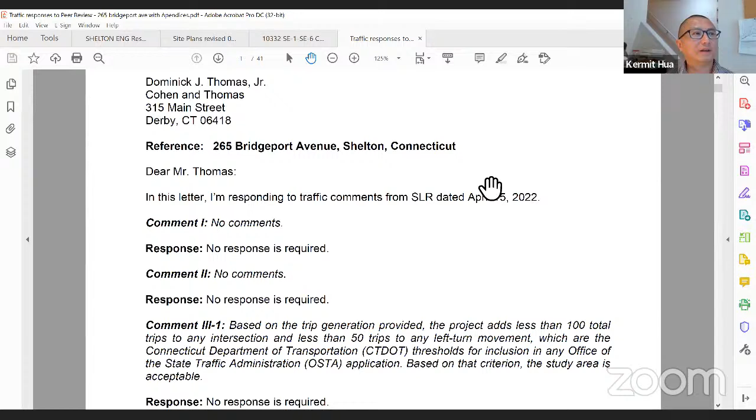I think for now this is fine, and probably we've got to make sure the chairman and commissioner can see it. I can blow it up and scroll down. Yeah, that'd be great, okay, if I do this and simply scroll down, that's fine. Alex, was this posted? Yes, because what I saw was something from January. There were three posted. All right, go ahead then.

Good evening, Madam Chair, members of the commission. For the record, my name is Kermit Hua, KWH Enterprise LLC in Meriden, Connecticut. We received the commission's consultant SLR's comments about 3 weeks ago and I responded. I really appreciate the town planner for hosting a meeting, allowing us to meet with the SLR staff online to go over the comments. Really appreciated the effort, it was very helpful for putting together these responses. The response letter dated May 10th, about a week ago, was submitted to the town planners and other parties, including the town's consultant SLR.

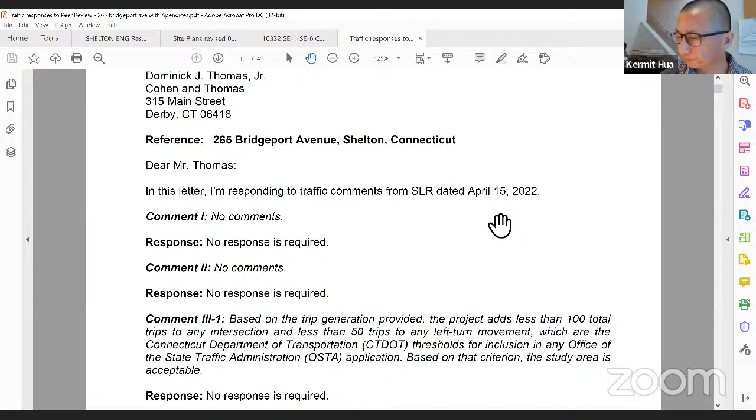Tonight I will just briefly go over the key points of SLR's comments and our responses. I will not read everything on the pages. If the chair or commission members have questions after my presentation, please feel free to raise them, or interrupt me as I go along. As you can see on the screen, comment 2.

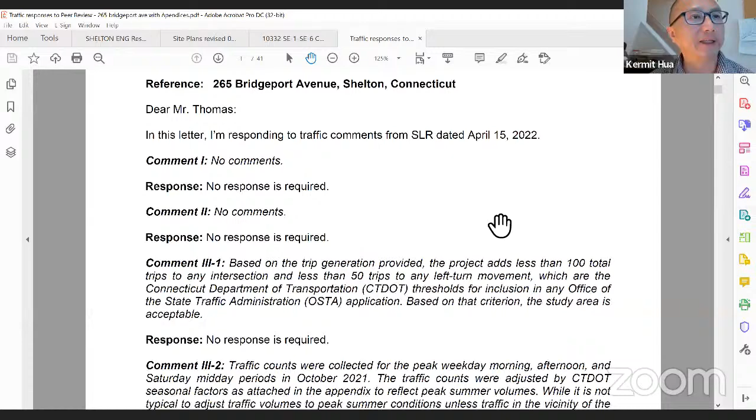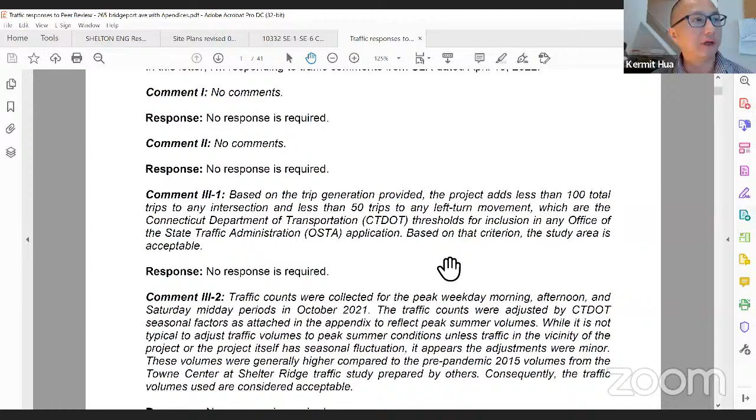Comment 3-1, SLR essentially looked at the study area, in other words the scope of the traffic study we submitted to the commission. Put another way, the number of intersections we included in the traffic analysis. Their conclusion, as the last sentence shows, is that based on that criteria, the study area is acceptable. So that's the point I want to mention.

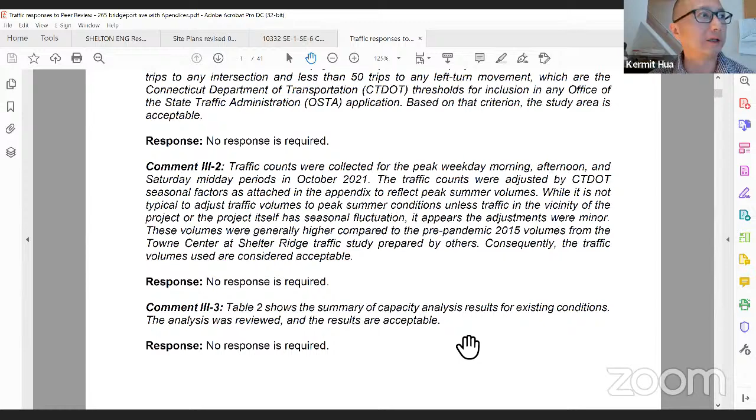Then comment 3-2 discussed the volumes we collected for this effort in late 2021, and the adjustment we made. Again, the last sentence of SLR's comment states the traffic volumes used are considered acceptable. Comment 3-3 talks about capacity analysis for the existing condition. Again, the analysis was reviewed and the results are acceptable.

If we can go to the next page. Comment 4-1 deals with no-build volumes, in other words the no-build scenario, the future traffic scenario without this development, including the growth rate we used, which was approved by Connecticut DOT. The conclusion from SLR is that the way we did that was acceptable.

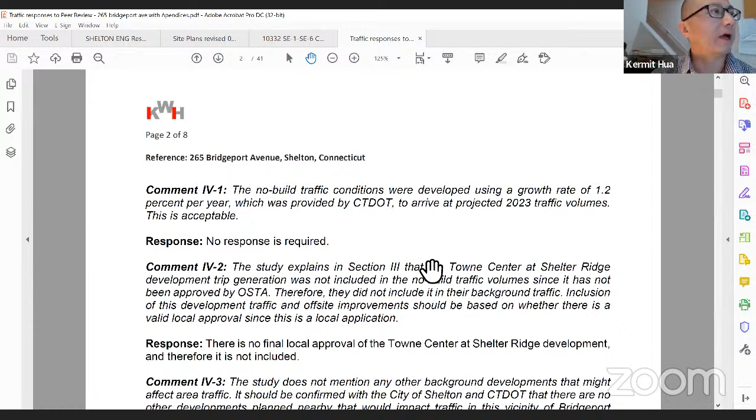Now comment 4-2: SLR consultants questioned whether we need to include the traffic from the Towne Center at Shelter Ridge development as part of the background traffic. We sorted this out during our online meeting with them, because there currently is no final local approval, as we understand it, for that Towne Center at Shelter Ridge development. So that's the reason we did not include it in the background traffic of the analysis.

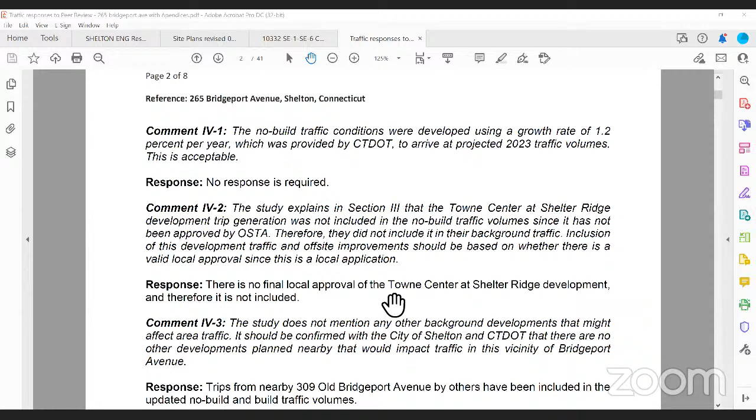That particular project, Shelter Ridge, is 2 miles south. Is that still within the study area? It is not within the study area. I think what's relevant is we looked at a traffic study prepared for that development, and sort of referenced the traffic volume they used against our collected counts. Okay, all right, that's where that comes in.

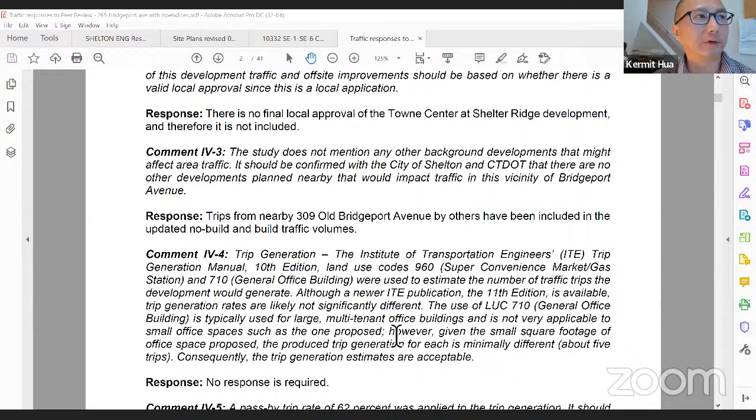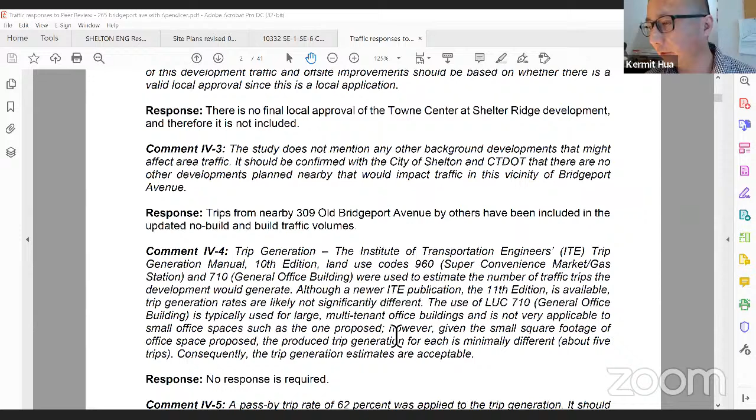Comment 4-3 asks whether there are other background developments that might affect traffic, especially the intersection of Cots Street and Bridgeport Avenue. In this case we agree there are - recently there's the 309 Old Bridgeport Avenue project that went before the commission. So in the revised traffic analysis, in response to these comments, we added the traffic from 309 Old Bridgeport Avenue. That's our response - it's a new apartment building, on Bridgeport Avenue, right east of the car dealership.

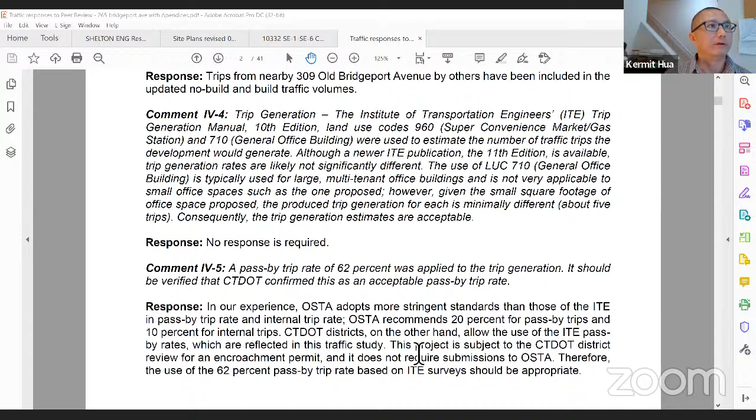Comment 4-4, trip generation. Again, they go through our method and the land use and so forth. The last sentence states the trip generation estimates are acceptable. So I want to highlight that the town's consultant agrees with our trip generation methods and estimates.

Commissioner Kelly has a question regarding the recommended trip generation. You talked about the apartment house, is that the only thing you included? I'm not quite sure if this came into fruition maybe a couple of months ago, the Moss property. Are you going to include something for that? A lot of properties have been sold up there, so it is going to be a project. It's not like Shelter Ridge in a kind of a dormant situation, this is going to be a valid project.

I can jump in on the Moss property, since I'm involved in it, I don't think it would be considered because no application has ever been made, not even for the subdivision. Isn't there an application for the road? There's an application for the road, but there's no application for uses on the lots.

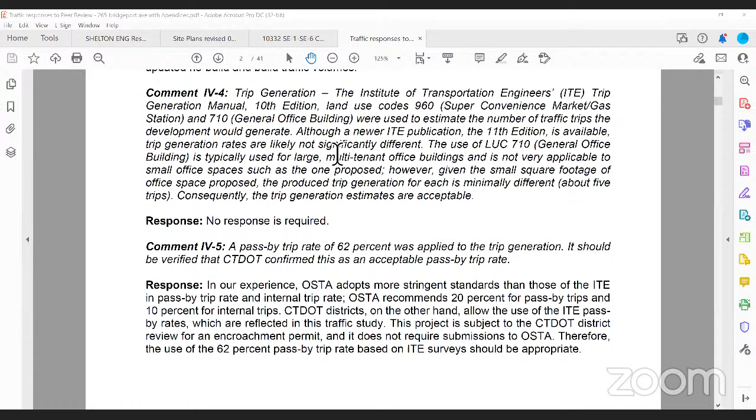So if we saw in the paper that one of the companies bought so many acres, should we consider that? I'll leave it up to Kermit to respond, but I don't think you should consider that, it's really speculative. No one knows what they're going to do until they file an application. Is that correct, Kermit? That is correct, I absolutely agree.

I think if we apply the same criteria we used on the town center development, if a project has been approved by the town, we are more comfortable including them in the background traffic. If it's only at a discussion phase, who knows whether that will go forward in the current form they are suggesting or not. So we really don't have anything to go by if they have not formally submitted anything to the town or have anything approved by the commission.

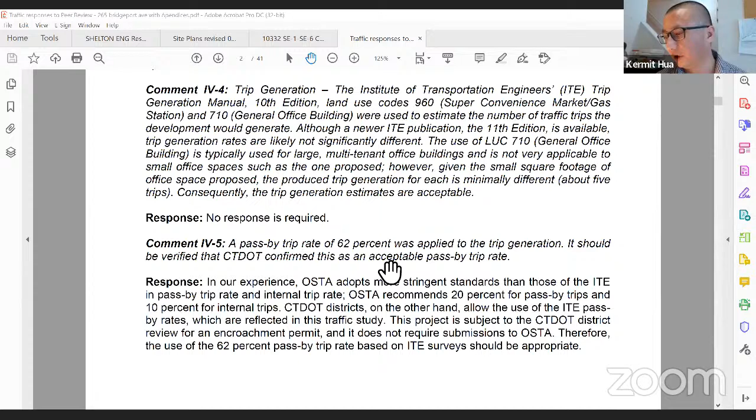Comment 4-5, the commission's consultant commented on the appropriateness of the pass-by trip rate of 62%, which was based on ITE data. I think their main point is OSTA, the Office of the State Traffic Administration, formerly the STC, tends to be more conservative in applying pass-by trips. On their review projects in the past, their practice is allowing up to 20%. But in this case, we do have ITE data. My argument at a meeting with SLR is that this project is not subject to OSTA review.

Our experience dealing with the CTDOT district office, which we will have to seek an encroachment permit from, they will review the traffic study. They are usually okay with using the ITE pass-by rate, in this case 62%. So that's my response. At the district office, in my experience, they've accepted these kinds of percentages, and since this is not subject to OSTA review, my professional opinion is the 62% pass-by rate is appropriate.

If we may go to the next page, page 3, comment 4-6. The trip generation volume figure should show pass-by trips, and they ask us to show those trips in separate figures. I attached those figures as part of this submission. If you print out the attachments to this response letter, they are all included in the appendices.

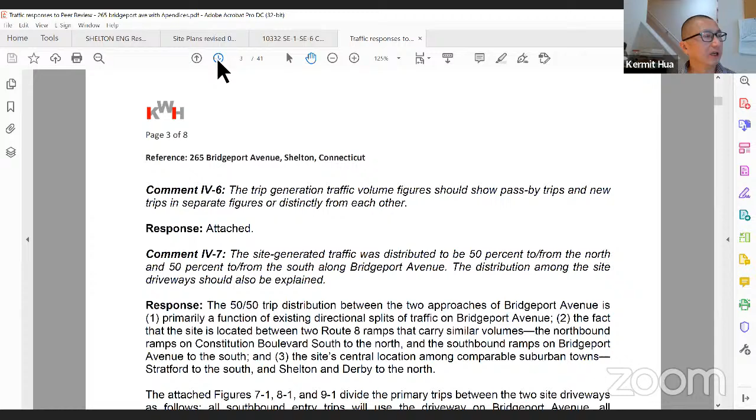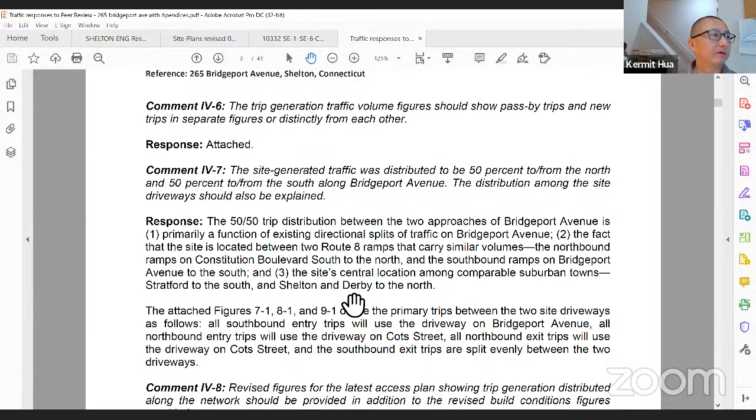Comment 4-7. The SLR is looking for more details in the trip distribution, which is 50% to the north and 50% to the south along Bridgeport Avenue. Here, as you can see, I provide two paragraphs of response to that question. There are several factors. The reason I use the 50-50 split between the two approaches.

One is the current volume is almost equally split between the two approaches of Bridgeport Avenue. The second point is the location is located at the midpoint of the two ramp intersections, one to the north via Constitution Boulevard South, and one right on Bridgeport Avenue.

The third point I made was that it's a central location in these comparable suburban areas, with Stratford to the south, and Shelton and Derby town center to the north. So it's in a central location. That's the reason I used the 50-50% split.

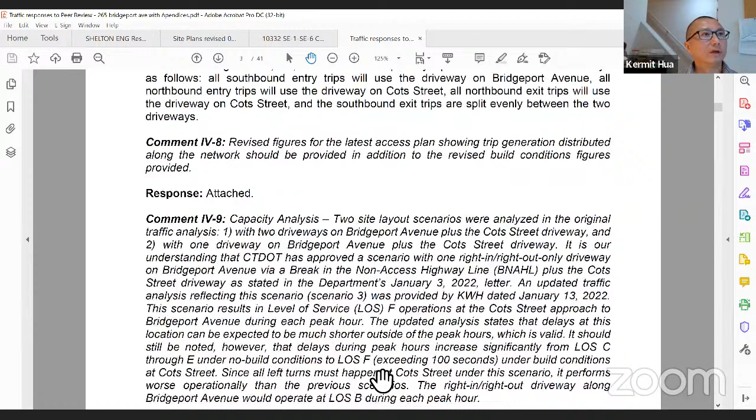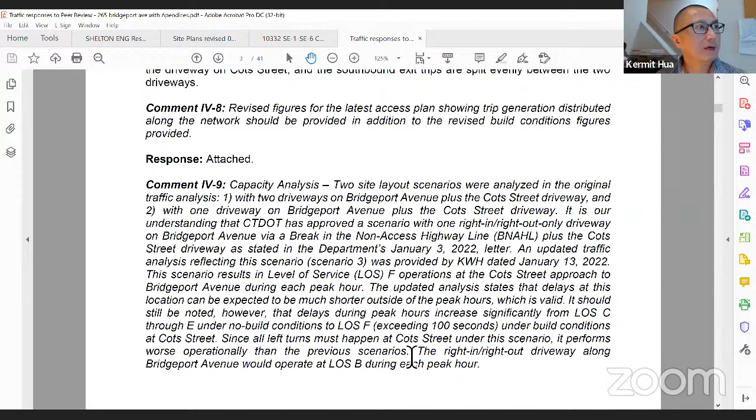So I provided more information in figures 7-1, 8-1, and 9-1 as described in the appendices attached to this response letter. That's my response to that comment. If you can scroll down, comment 4-8 is about the revised figure showing the distribution.

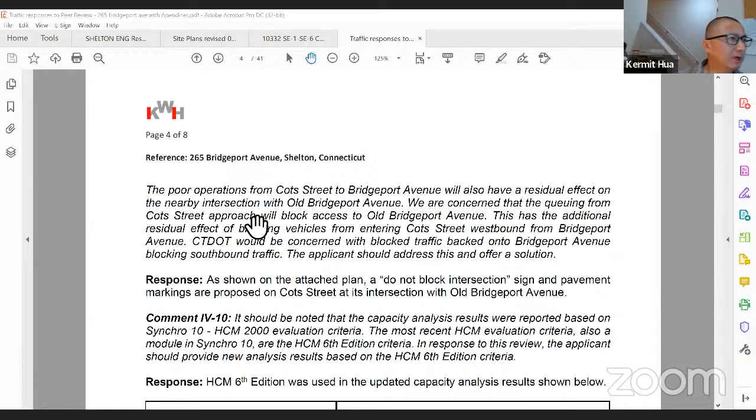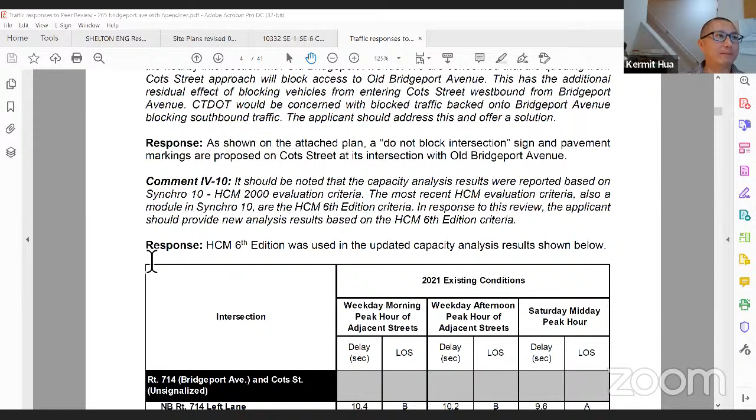Comment 4-10: the consultant commented that we were using Highway Capacity Manual version 2000, but they wanted to see Highway Capacity Manual 6th edition. In response, I made the changes, and as you can see here, I included all the traffic analysis tables following the 6th edition as the consultant wished. That's been addressed in those three tables.

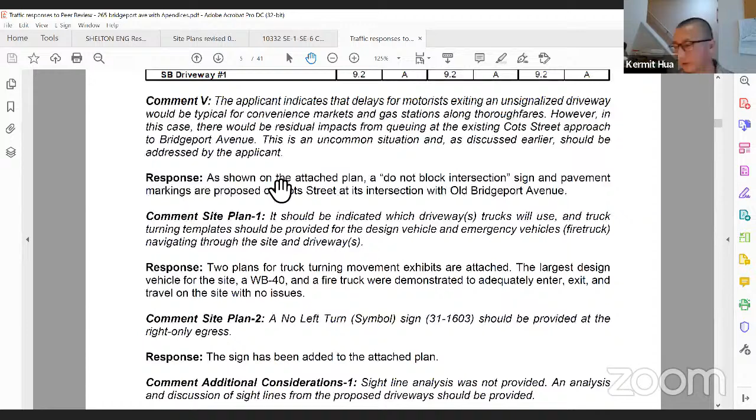On the next page, comment number 5, that's essentially the same comment about the closeness of the two intersections, so the response is the same. We're proposing a 'do not block intersection' sign and a pavement marking to reinforce the message of not blocking the intersection.

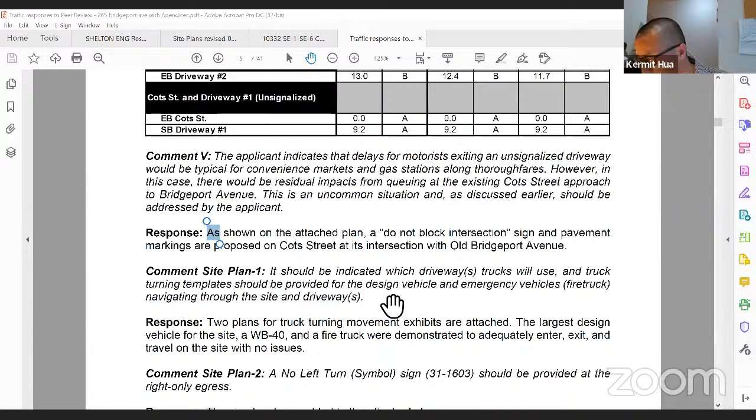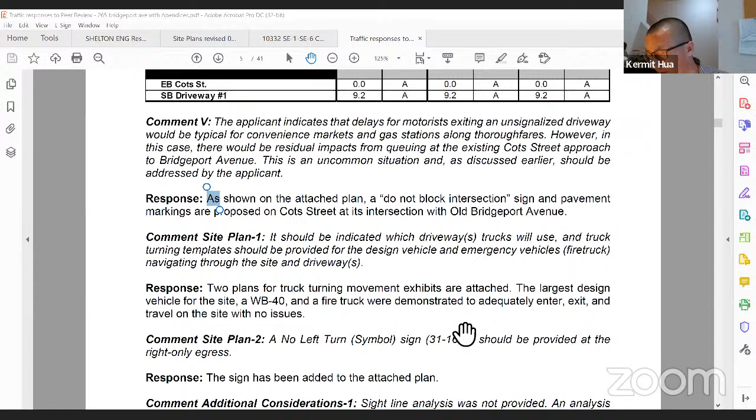About site plans, Brian will be in a better position to address those. Just briefly, we provided all the truck turning movement exhibits the consultant asked for, including fire trucks and the largest tractor trailer, the oil delivery tractor trailer for the site.

Comment site plan-2: a no left turn sign should be provided at the right-only egress driveway. They're talking about a driveway on Bridgeport Avenue. I think that sign has been incorporated on the site plan.

At the bottom of page 5, comment additional considerations-1 is about sightlines. I think the sightlines on both Bridgeport Avenue and Cots Street have been added to the site development plan. Now we're at page 6, comment additional considerations-2, crash analysis.

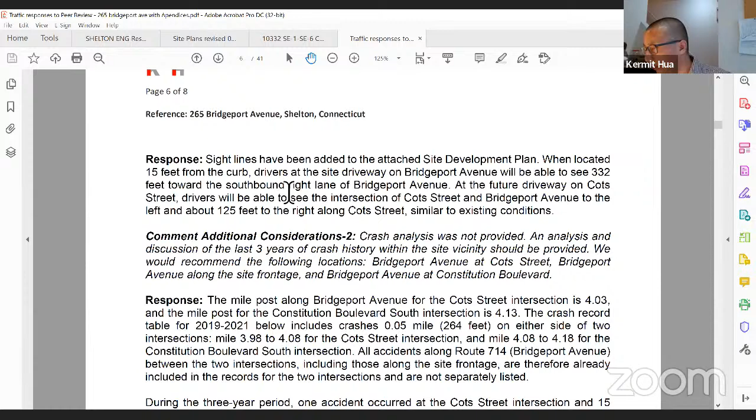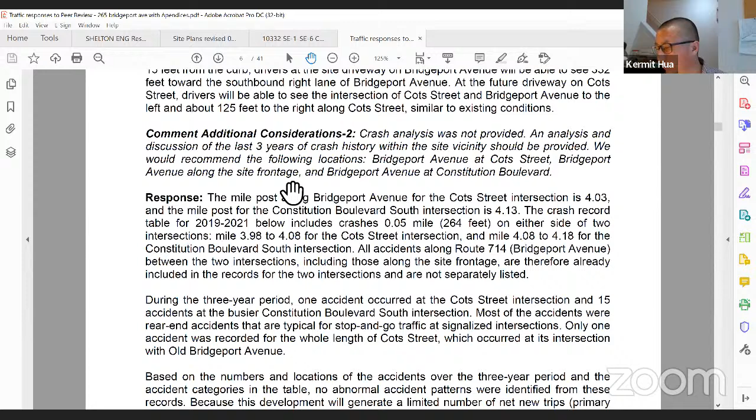That has been included on page 7: the crash analysis for the intersection of Bridgeport Avenue and Cots Street, Bridgeport Avenue and Constitution Boulevard South, and Cots Street. I summarized the accident records for the past three years, 2019 through 2021. There was one accident at the intersection of Cots Street and Bridgeport Avenue, our key access intersection, so not much going on there over the three-year period.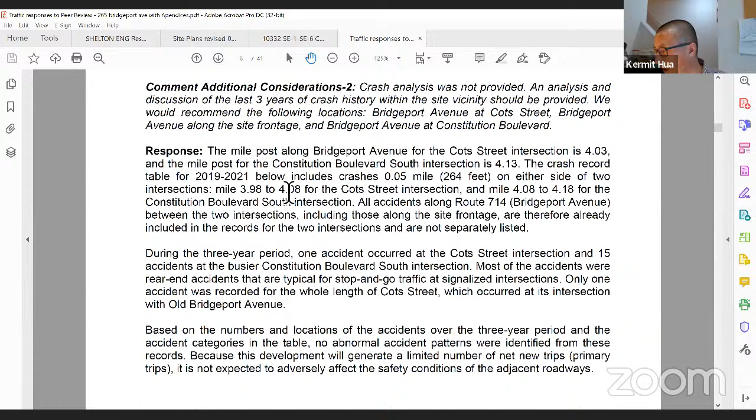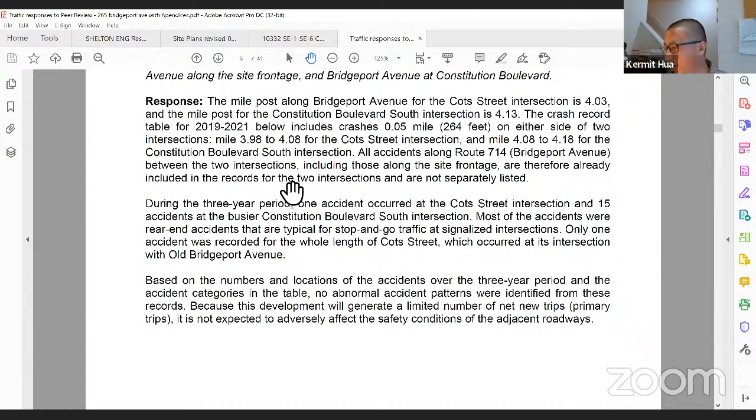Also on Cots Street, remember this is the whole length, not just the section near the gas station, we only had one accident. The records did show 15 accidents over three years at the intersection to the north, Bridgeport Avenue and Constitution Boulevard South, averaging about 5 per year at that relatively busy intersection, since it has access to the ramps further east on Constitution Boulevard South. That's the accident summary, and we're at page 7.

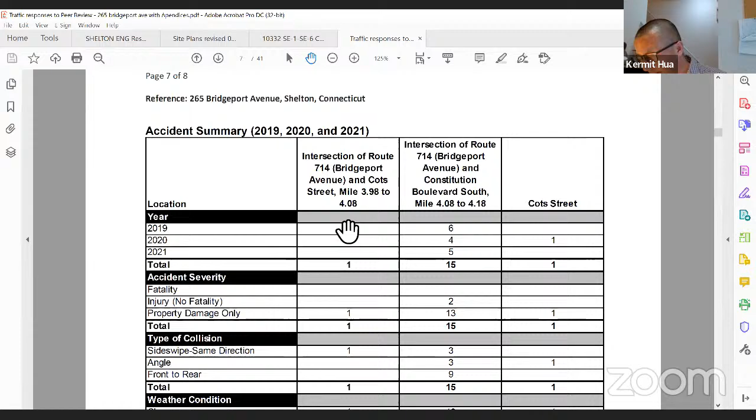Comment on Constitution Boulevard West: SLR basically said this gas station most likely happened before all the proposed improvements to Constitution Boulevard West will happen, so that comment really does not require any response from us.

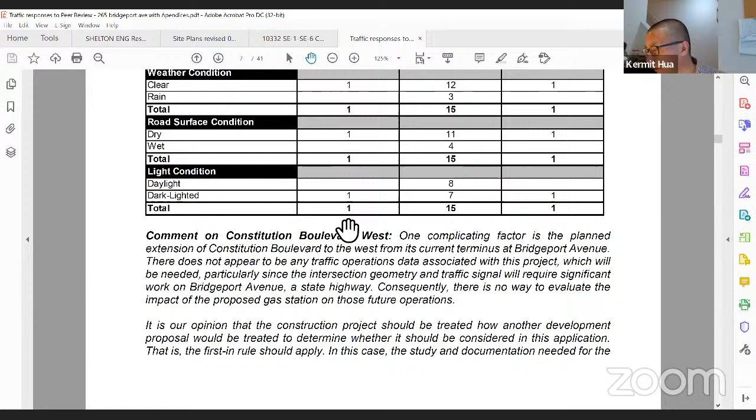So that's all I have, Madam Chair, unless the commission members have any questions. Any members of the commission have any questions for Kermit? Mr. Panico, how about you?

It's difficult to respond at this time. I don't agree with a lot of the statements that were made, but I think it needs further discussion and review before I can comment intelligently on it.

The one thing I would say is about the suggestion to post signs and do pavement markings. There are other places in town where signs have been installed saying no left turn, and people do it anyways. There are areas downtown with pavement markings showing not to block the intersection, and something happens where the road has to be torn up and those markings aren't replaced. So while it's a good idea, it doesn't always work out to do what it's supposed to.

Also, my major concern at that intersection is traffic coming off of Bridgeport Avenue that wants to proceed on Old Bridgeport Avenue. If they're not able to, and they have to stop and wait, you're going to be blocking that direction of traffic on Bridgeport Avenue. I don't know how you can avoid it. I don't have a suggestion to correct it, but it's going to be a major issue. And the volumes are going to go up a lot on Cots Street for motor vehicles trying to leave to get onto Bridgeport Avenue to go east or west.

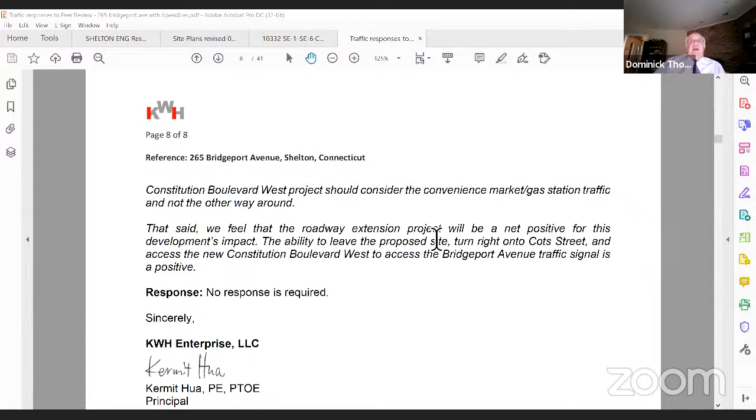Brian, are you there? I am. Can you hear me? Yes, I can. Can you see my screen? Can you see the map now up on the screen? I can. Okay.

And Brian, do you want to go through the map first and then through the response to the engineer?

So Dominick, I might be able to run through quickly what changes have occurred on the plans. I've grouped it into responses to the city engineer's comments, some minor comments incorporated as part of the peer review, and a couple of lingering general changes to the site plan. I thought I might tick down the city engineer's comments and explain to the commission how it has been responded to in the plans.

Brian, did you state your full name for the record? Of course, Brian McMahon, licensed professional engineer with Redniss and Mead Inc., out of Stamford.

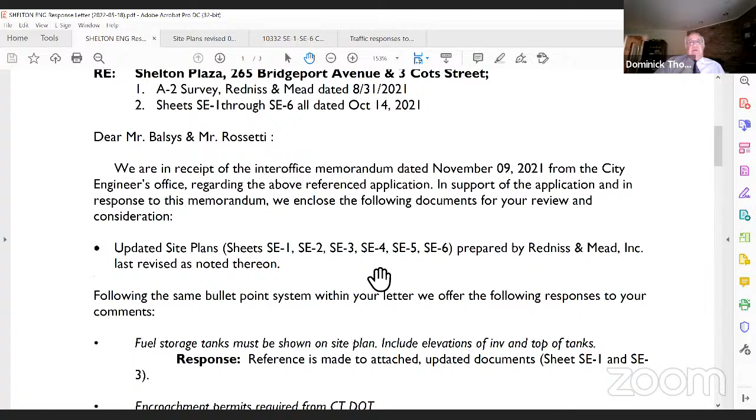Okay, I'm going to run down real quickly, there's not too many of them. The city engineer's comments were from way back when the application was originally filed. I have the responses right here, I'll jump around just to group them by what is relevant to the plans and what is not relevant to the plans.

So the fuel storage tanks, that first bullet point there, the city engineer asked that we depict those with elevations on the plans. We have done so on sheet SE-1 and SE-3, through coordination with the prospective vendor of the tanks.

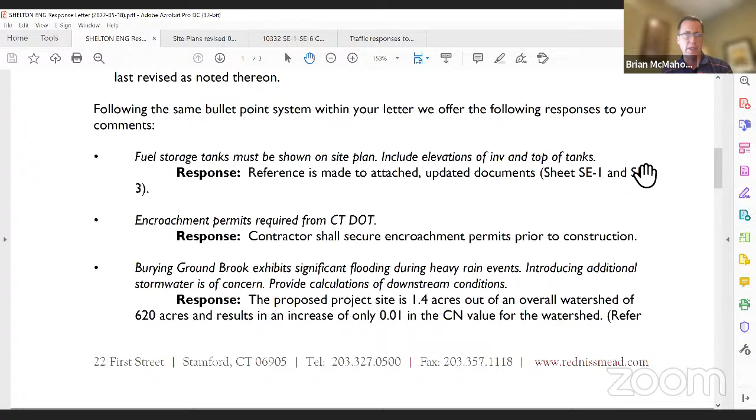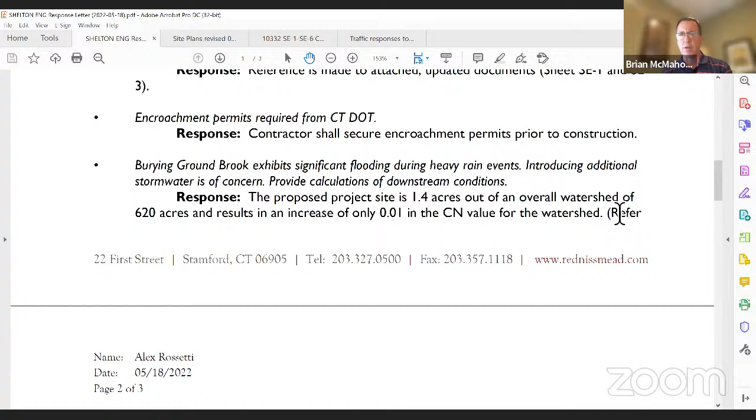If you could scroll down. The second bullet point, encroachment permits are required from the Connecticut DOT. We acknowledge those permits aren't secured until a contractor is assigned and it's ready to go to construction, but it is fully understood that any work within the right-of-way cannot occur unless and until those permits are secured.

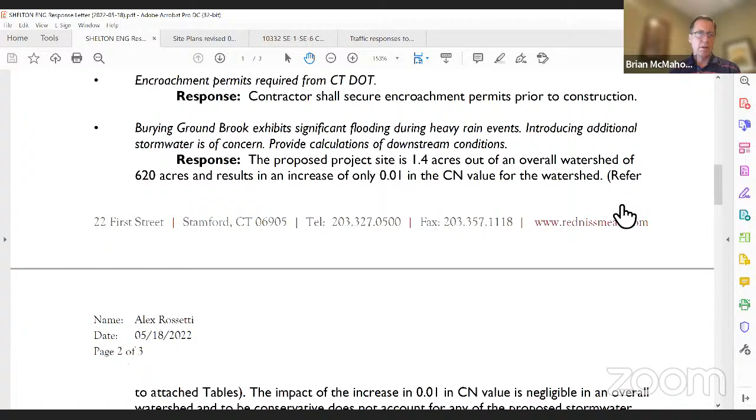If you could scroll down, Dominic, please. There you go, that's good. So the sump elevations were missing. The sumps are the spaces between the outlets of a catch basin and the bottom of the catch basin itself. We have added that information onto sheet SE-3, as well as the next comment, the inset map, which we've added to sheet SE-1.

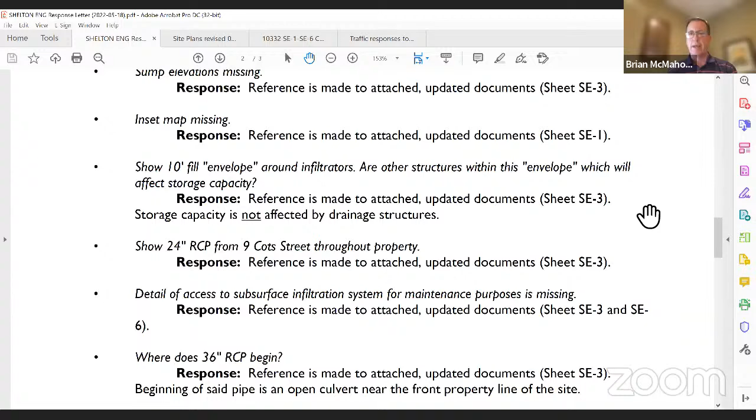The next comment showed a 10-foot fill envelope around the infiltration system, the stormwater mitigation system. The city engineer questioned whether any structures in the area would affect the storage capacity and performance of the stormwater attenuation system. We have shown that fill envelope on sheet SE3, and confirmed that any structures or pipes in the area have no bearing on the capacity of the stormwater management system.

The existing 24-inch concrete pipe that runs through an easement on our site and drains water from 9 Cots Street, which is the medical building adjacent to the site just west of it, we have extended to show the full pipe run as requested. That is on sheet SE-3.

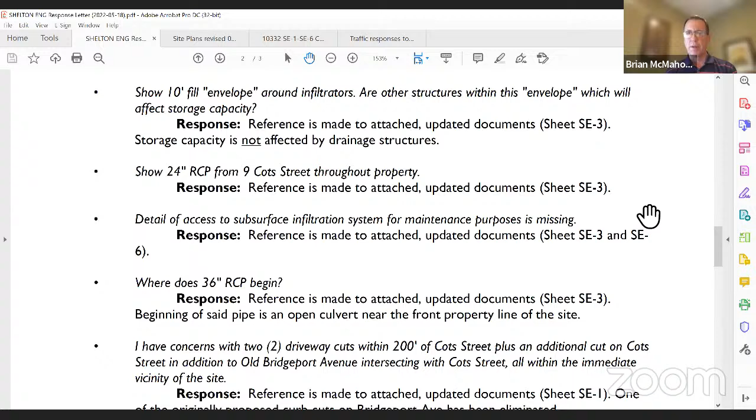Details of the access to the subsurface infiltration system for maintenance purposes - we have added that in, reflected both in plan view on SE-3 and in detail on SE-6. You questioned where the 36-inch concrete pipe begins - it actually begins on our site. It is an open-ended culvert and has been shown on the plans and continues to be shown.

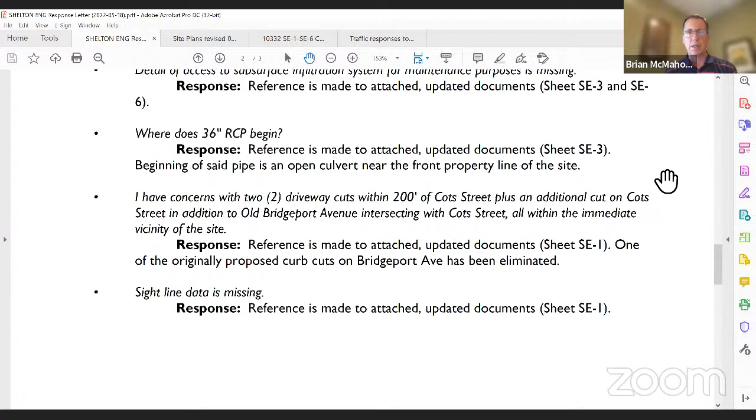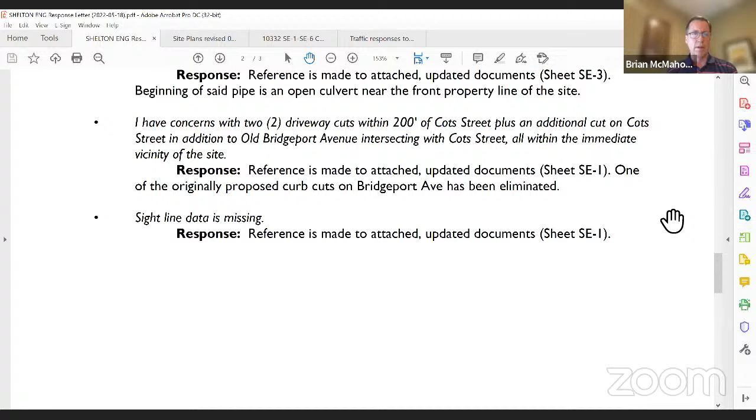This next comment is a bit of a moot point - he had expressed concern about having 2 curb cuts on Bridgeport Avenue, so that is no longer an issue. As the commission knows, there is only 1 curb cut now. And the sightline data, which we added as part of this, is only for the proposed curb cut on Bridgeport Avenue, shown on sheet SE-1.

All of those comments that go to the plans, all of the changes that I've mentioned here were part of the April 14th drawing set and have been on since then.

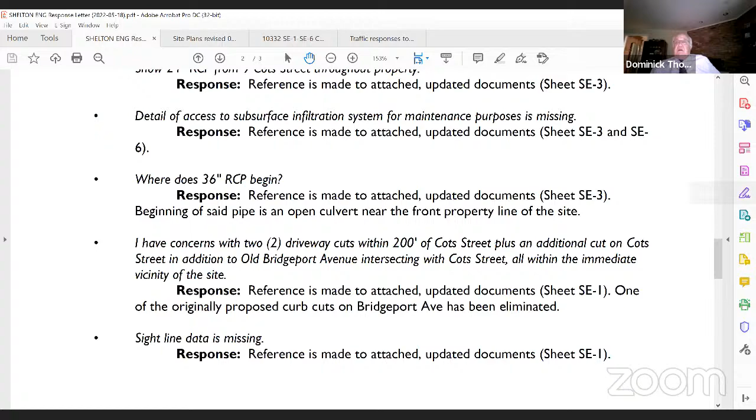If you could scroll up, please, Dominic. Oh excuse me, on the letter - whoops, wrong thing, okay, wrong job. So that's good, that's good right there.

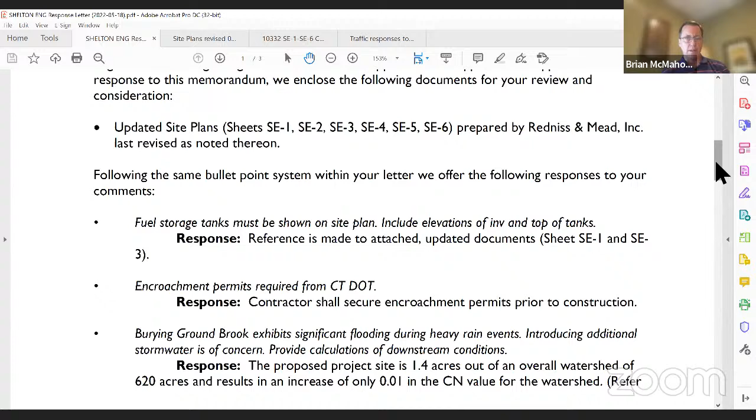So the last 2 comments the city engineer had were a concern about the burying ground brook. I had spoken with Remus about this and learned a bit more about his specific concern. It was relative to a few driveways on the opposite side of Bridgeport Avenue, north of our site, in fact north of, I believe, Constitution Boulevard, where several years ago during a heavy rainfall, culverts that carry the brook under these driveways had washed out.

I explained to him that I felt that our site, notwithstanding the fact that there is an increase in coverage on the site, is a small part of the overall watershed of the Burying Ground Brook in this area.

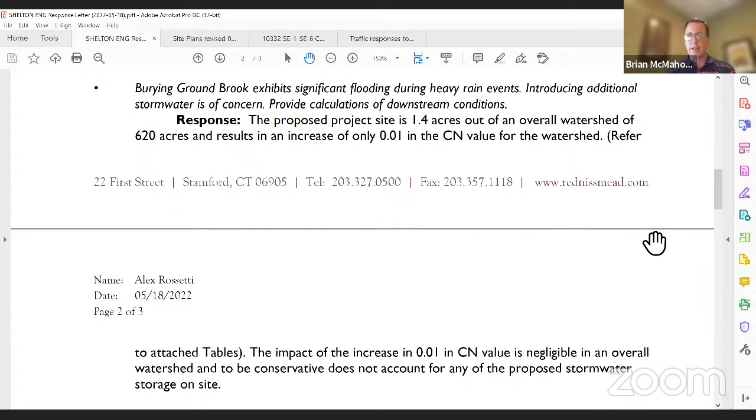In coordination with the city engineer, we took a look at the record FEMA flood insurance study for Fairfield County. It shows that in the area of the Burying Ground Brook near our site, there's about a square mile, or just under 640, about 620 acres of watershed that feed through the brook at that point. We did an analysis, included with our response letter, of the effect of that on what we call the CN, the coverage of the surface treatment of the watershed area.

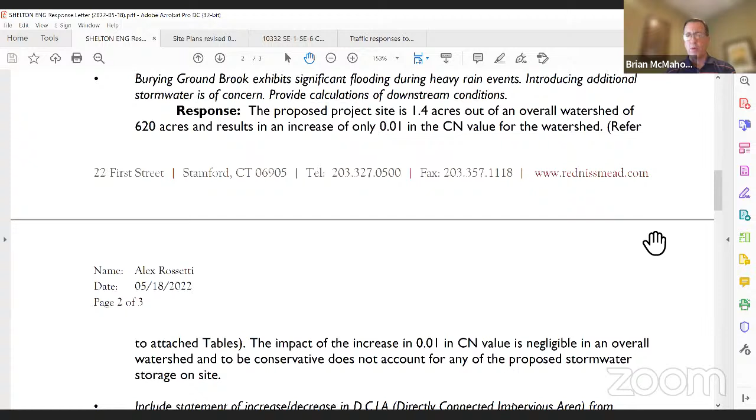It had almost no impact at all when you take into account our 1.4 acre site within the 620 acre watershed that is part of the Burying Ground Brook in this area. It had almost no effect on what we call the CN, the coefficient for the surface treatment within the watershed.

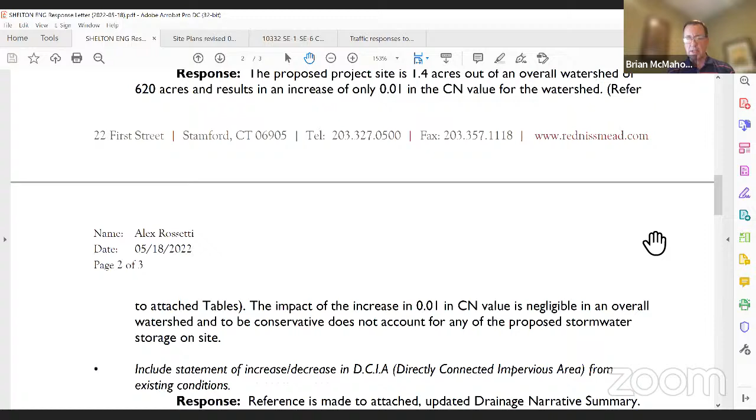That's coupled with the fact that it doesn't even take into account the storage we have proposed on the site for attenuation. We've provided a system that not only provides water quality infiltration into the ground, but also controls peak rates of runoff from the site at or below existing conditions. So I believe we have demonstrated that our development is not going to exacerbate any flooding conditions in the Burying Ground Brook downstream of our site.

And then finally, the statement - I had one more comment, Dunn, if you don't mind. The one below that is most municipalities need to track now, the directly connected impervious area. That refers to impervious area that is tributary directly to receiving storm drains without any treatment, whether through a structural system such as we proposed here, or some type of biofiltration across vegetated areas.

What we've demonstrated is that all of the impervious coverage under existing conditions is directly connected, and virtually none of it under proposed conditions is. We are capturing all of the impervious coverage under proposed conditions and treating it through the proposed stormwater management system. That's the sum total of the city engineer's comments.

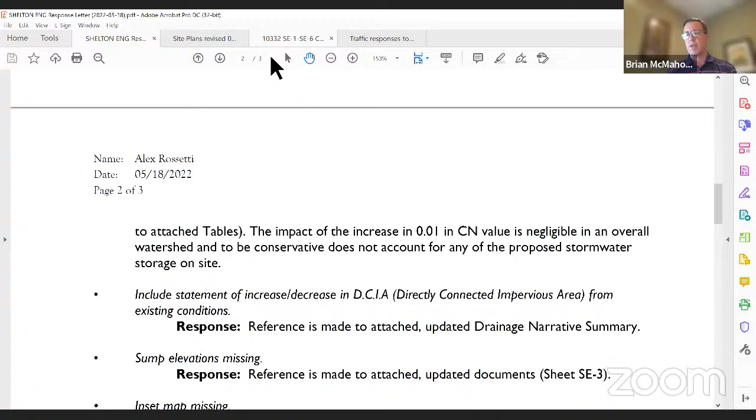Additionally, as Kermit mentioned earlier, in the more recent set of plans we submitted, and to the chair's question at the beginning, the only difference between the April 14th drawings and the more recent drawings are the few comments born out of the peer review. That's really the pavement markings and signage located primarily at the Cott Street intersection, as well as the no left turn sign that will be placed at the Bridgeport Avenue curb cut.

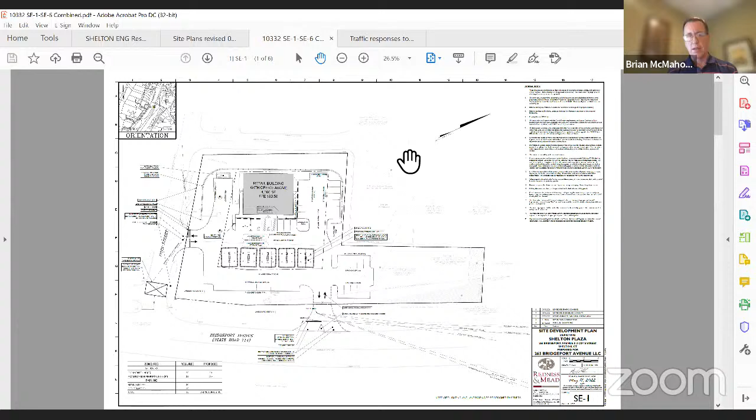Whoops. Oh, Dominic messed up here.

Other than that, I would just point out to the commission a couple of general items, in addition, one other change to the site plan overall as it has evolved from when it was first presented.

Brian, let me see if I can get him back up. I have an issue here, okay? Just hold on a second. I'm gonna stop sharing, I'm gonna see if I can get the plans back up again. There was something that happened to mine. Let me just see here. Yeah, hold on. Let me... You want me to try and share? If you can bring it up, if you can share, why don't you try to bring it up? I seem to have had an issue with the computer. Can you see it? Yep.

Yes, okay. So one last comment, just to point out a change in the evolution of the plan, and I think it went mainly to one of Mr. Panico's comments, is to increase the green space along the frontage here. One of the changes we did was we pulled this paved area, which had been closer to Cott Street, and pulled it away, moving some of the utility infrastructure out of that area to increase the room and pull it away, increasing the green space along the Cott Street frontage.

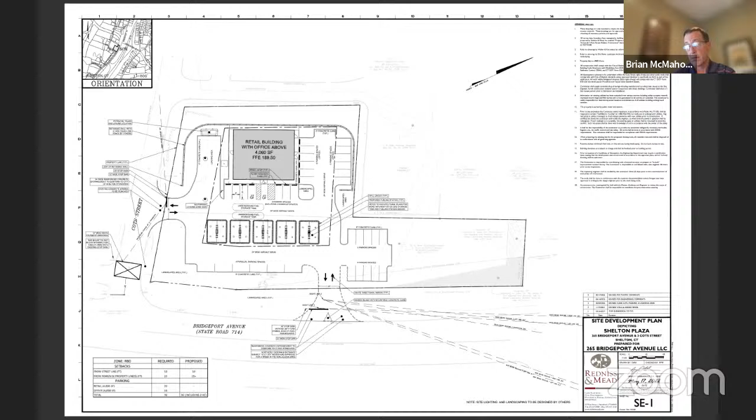While that may be the case, I think it's best to have one direction that cars face, otherwise you've got cars facing each other. If we put that into place behind the Stop and Shop, at first they wanted the cars to come in closest to the little driveway in front of Burger King where the pumps were gonna be, and I held out that cars should continue further down the driveway, heading towards the back of Stop and Shop, and then come in and face Bridgeport Avenue.

So I think you better look at that so there's no conflict when you have a tight space. I can see a little bit of congestion there occurring, and some bottleneck occurring if cars are not directed to come in and face a certain way and exit a certain way.

Well, you've got 4 cars per pump, right? Yeah. But again, I think if you eliminate one of them, you'll eliminate some congestion. The volume would be down, but you still have to have a specific direction - even if you eliminate one, you could have 20 cars. And that's not taking into account somebody coming in just for the convenience store, or occupants for the second floor office section of the building that's proposed. So I think the traffic pattern to access the pumps has to be determined.

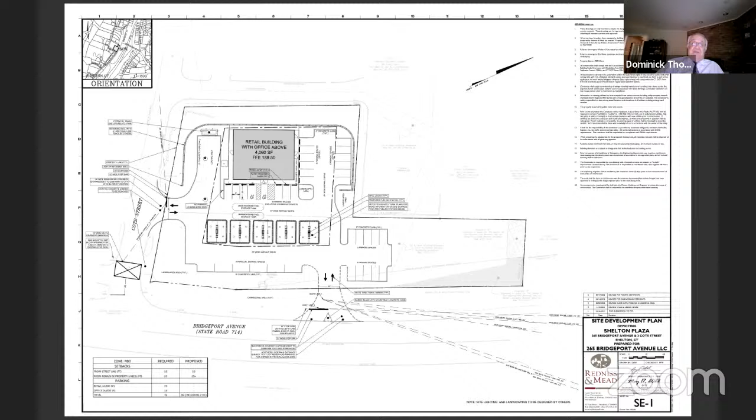Okay, and I hope no apartments either. That would require a modification, but since we've been talking a lot about traffic, I would just comment that it would be much less traffic, but I'll leave it at that.

Madam Chairman - yes, go ahead, Mr. Panico. I just wanted to advise the applicant that I did set down probably 5, 6, or 7 comments, most of which are relatively minor - it's only a matter of addressing them. But there were 1 or 2. Rather than getting into a discussion of them tonight, I think I would just advise the applicant that they'll be seeing it, and we will be looking forward to their responses.

Is this something that's already been filed? Because I don't think we have it yet. No, it hasn't been officially filed yet - I drafted it, and we're talking about it and making sure that we're in agreement on it.

Some are technical. The zoning requirement requires a 10-foot green buffer strip, and you don't have it along that northerly property line. On the other hand, a slight shift of the building towards Cott Street by 5 feet or so should be able to address it.

Some minor things about getting rid of the bumper blocks that you show - we've talked about it before, but they haven't been resolved. The adjustment of the parking pattern so that the clear space for the handicap spot falls directly in front of the door rather than directly in front of a car. The spaces parallel to Bridgeport Avenue are shown as 20 feet - you really can't negotiate very comfortably into a 20-foot parallel parking space, so it needs to be bumped up a little bit. Things like that, we'll get them to you.

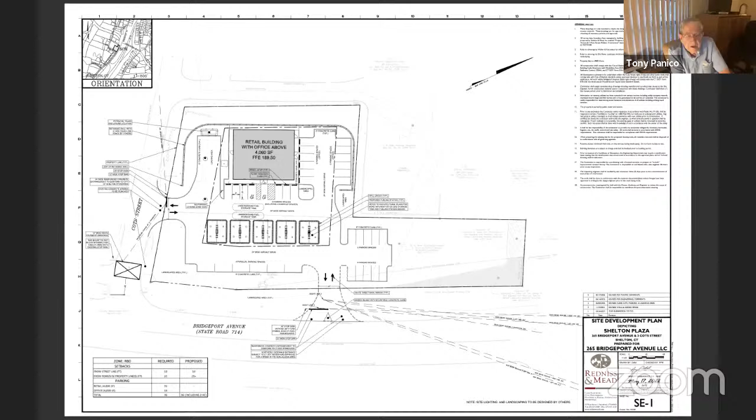And I don't want you to walk away thinking, well, we haven't said anything, so we got no more concerns, because we do. No, thank you for bringing all that up, and the applicant can address those when they're submitted.

Okay, any further comments, questions, or concerns before we open it up to the public?

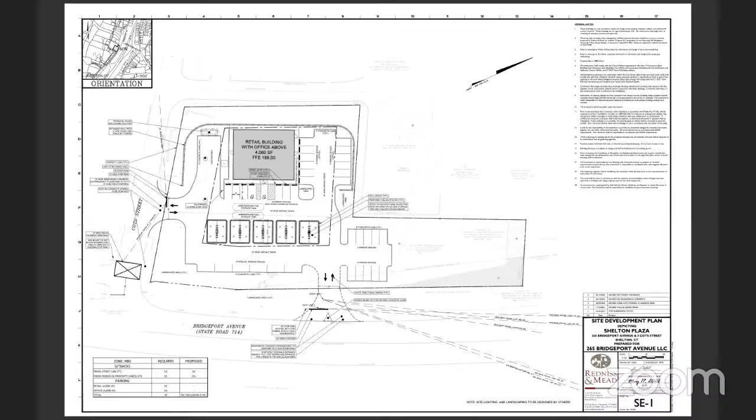Madam Chairman, members of the commission and staff, my name is Joel Green. I practice law in Bridgeport with the law offices of Green and Gross. It's my pleasure to be here before you this evening on behalf of 99 Bridgeport Avenue LLC. I've heard the comments and remarks by the commission this evening and Attorney Thomas's presentation, and I just wanted to

confirm that the hearing will be held open. And I suppose I would also ask that perhaps we can set a schedule for sort of comments or responses. The complication that we ran into is that for a variety of reasons, many of the documents were posted on Monday, and our consultants did not have adequate time to prepare and review a written response to the commission. And perhaps the commission would consider, first of all, keeping the public hearing open, which as I understand may be happening, but also perhaps we can set a date by which any further submissions by the applicant in response to the commission's comments this evening would be submitted, so that we have an orderly process.

So, with that understanding, it's not my intention to make a presentation this evening, and I appreciate the consideration by the commission. Okay, thank you, thank you, Attorney Green.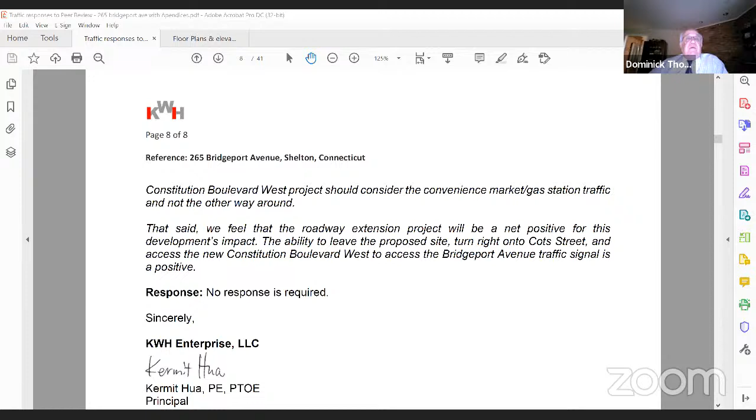So it was left up to Mr. Swift to go back to an original concept that we had once discussed, and that's what we've done. So with hopefully the luck of being able to go here. Okay, so with that, I'll turn it over to Mr. Swift to discuss the changes to the site plan and review his plans, which were provided in early April and made it onto the website, I believe, again on Monday.

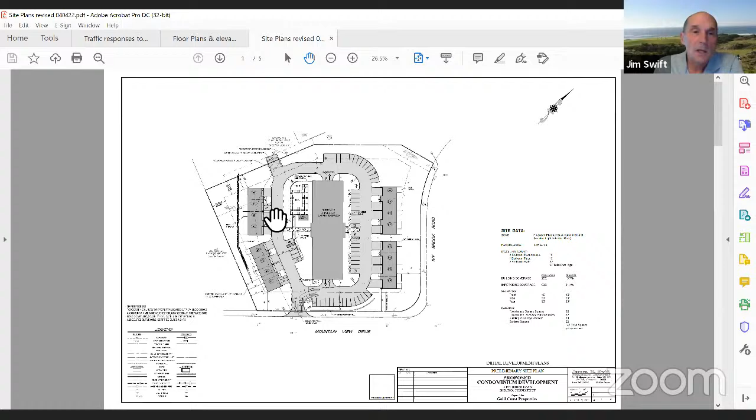Good evening, my name is Jim Swift, professional engineer, landscape architect. So on this drawing, I think my cursor is on the screen. Jim, do you want to share? Can you share from yours? I can share from mine. I have mine, I'll stop share then. Why don't you go ahead and share? Okay, go ahead. You transfer it over to my computer. Well, I think that's Alex's job. Is my display showing properly, the original application? No, not yet. Okay, I'll hang on. Jim, you just have to start sharing. Did you hit, Mr. Swift, you just have to start sharing. Oh okay. Start sharing, whatever that is. Share screen, there we go. Choose the technology. Okay, there we go, I am screen sharing.

All right, okay, so what you see on the screen now I believe is the original application, and you can see that the easement that Dominick was talking about is this area over on the site on this side, which limited us quite a bit on what we could do on our site. And we have revised, and now that we've negotiated use of that property, this plan is the current plan that was recently submitted and is now on the site.

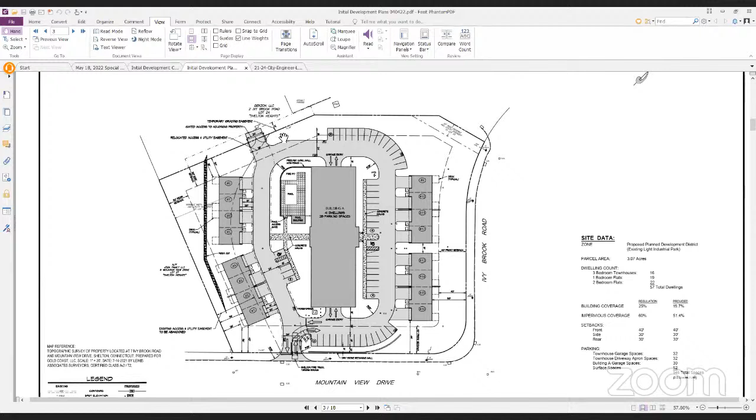Commissioner Kelly, were you referring perhaps to, is it a fully paved area or blocks? Well, no, they were talking about blasting to do it, so I wasn't quite sure if it was drivable at this point. Right, if you could go through it.

Well, okay, let me go to the next drawing and we'll discuss that. So here's the grading plan for that. And the way things worked out is that this area in the adjoining property is the area that was graded flat, for all intents and purposes, to build that second medical building. And we know what that elevation is, we've surveyed it.

And this driveway, this emergency vehicle access right here, is accessible by grade. It can be driven, if the gate was open, Mr. Kelly. That is accessible, so the slope is such that it can accommodate.

So they can go from their existing building, they can use this? Yes, yes. They don't have an existing building back there, that's a proposed building. The original building is farther up, on a separate lot, under separate ownership now.

All right, so how do they get to the road? Is this an access to nowhere? No. This open flat area that they have pre-prepared for a second medical building is connected throughout all of their property back here. In other words, their main medical access driveway is located right here. That's what I'm getting at.

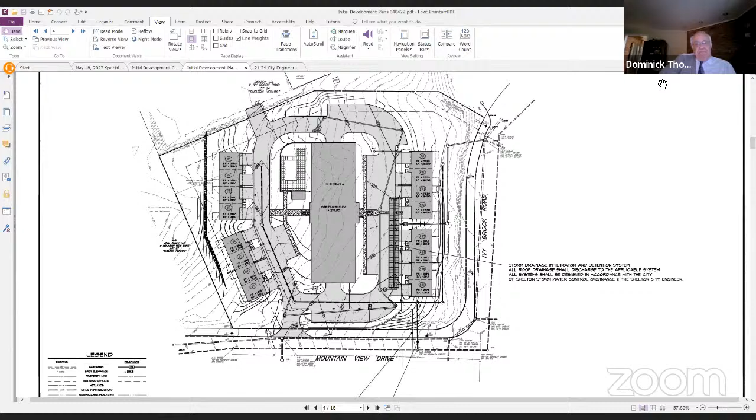Okay, go ahead, Mr. Swift. Okay, so having that flexibility, what we've done is we talked about a lot of things at the last meeting. One of the things was parking, another was building heights. And what we've done here is now that we've negotiated the release of that easement, we've doubled the townhouse count from the original 8 townhouses in the front to a total of 16 townhouses in the back and front.

And we've taken off a floor of building A, the main building. So our unit count, where we previously had a total unit count, townhouses and building A inclusive, of 63, we are now down to 57 dwellings total for all the townhouses and the building A dwellings. So we've reduced building A by a complete floor and we've reduced the unit count by 6.

Now, the second result of doing that is that the parking dynamics have changed. Even though the surface parking is the same, what we're gaining by the townhouses is we're gaining 2 garage spaces per townhouse and 2 of the apron parking spaces for the townhouses. So our previous parking count of 136 has now increased to a total parking count of 146.

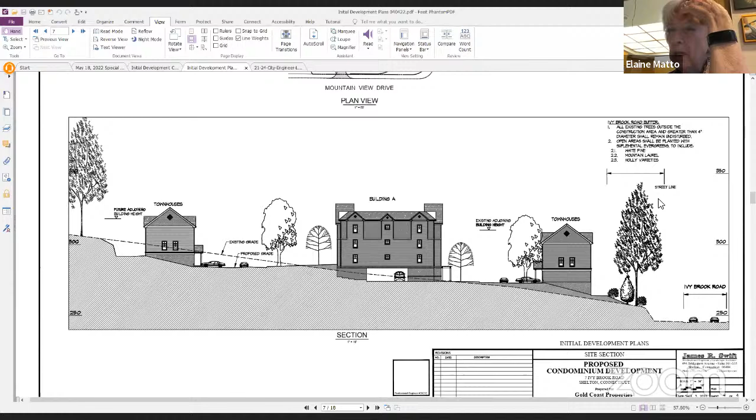Yeah, I have, it's Elaine Matto. I have a question again about parking. I can't accept that kind of analysis of the parking for the total site when you have 4 spaces basically for each townhouse, which is great. But I need to know what the parking is for the apartment style building - how many units are in there and how many parking spaces are dedicated to that building?

Sure, I can tell you the number for that. If you subtract out the garage parking spaces and the apron parking spaces, that's 32 and 32, you're going to be left with 82. And how many units are in that building? There are 41.

So, are they 1 bedroom, 2 bedroom? I can't remember. Were they all 2 bedroom? There are 19 - and Pat, you may want to check me on this - there's 19 1-bedrooms and 22 2-bedrooms. Yeah, that's what I have. For a total of 41 dwellings.

Yeah, so I still think that parking is tight. Okay, that's 2 per unit? Yes. Well, there's no - I have one more suggestion, which we could do.

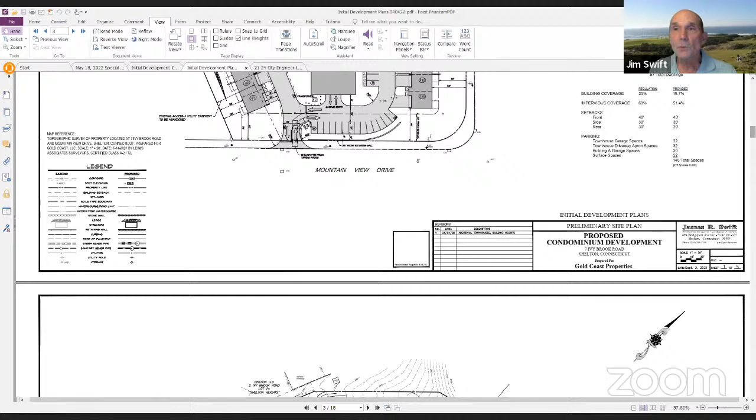This circular pattern that we have around building A, I kind of liked as a designer, but we've got a lot of area over here that we're not really using. And if you look at the grading, it's got some pitch to it, but it's definitely usable. What we can do is add a significant amount of parking in that location.

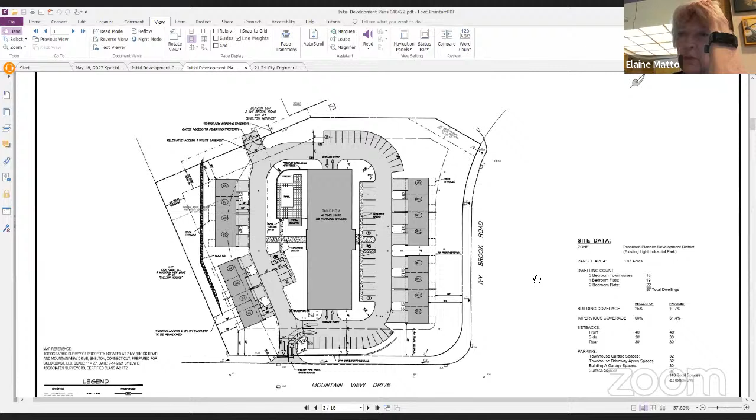I'm going to guess, I'd like to know what other people think as well, but this was proposed as partly a plan that would leave a lot of area undisturbed. And when we talk about the need for parking, because you cannot have overflow parking on the street in this area, then you talk about putting in more pavement. So it just, I have a concern.

The only thing I would like to address, and I know you've brought up, and believe me, in upcoming public hearings it's going to be addressed. There are many, you have approved some in the outer areas. This is an outer, not urban area. There's no issue with parking. There's been no issue with parking with the Mark. There's been no issue with parking with the Sawmill Apartments. There's been no issue with parking, and they are less than 2. So I guess I'm at a loss.

It's very difficult to respond when the existing apartments, the existing high-density residential, has no problem and has been around for years. The parking at the Mark, which is 228 apartments and has a clubhouse, our final resolution was 1.7, and if you go there at night, I can assure you there are empty spaces. So my whole point is now we have 2. I think maybe we can dedicate something to say future area, but I'm anti-asphalt. I don't see the need when you have 2.0 dedicated. I'm not asking for more asphalt, I'm questioning the density of the project overall for this site.

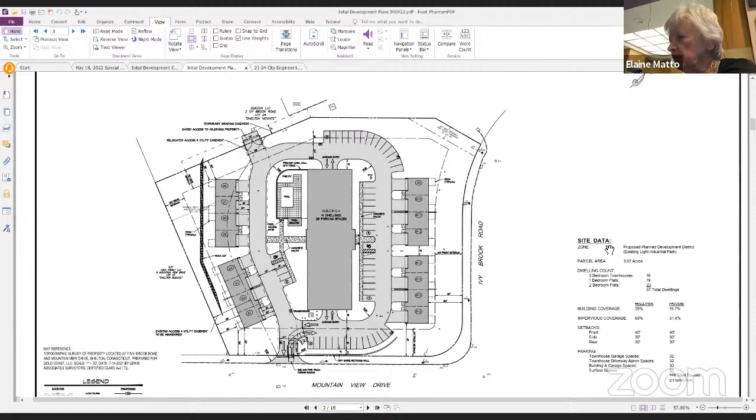Well, what was the square footage of those flats again? Excuse me, I didn't hear. This is Commissioner Ticky, what was the square footage of those flats again? You'll have to, Pat Rose would have to do it. Commissioner Ticky, you have a big echo going on when you talk, just so you know. Sorry, it's difficult sometimes to hear. The square footage of the units that are the flats, the 2 bedrooms are about 941 square feet, and the 1 bedrooms range from 659 to 701. Fairly standard for other venues.

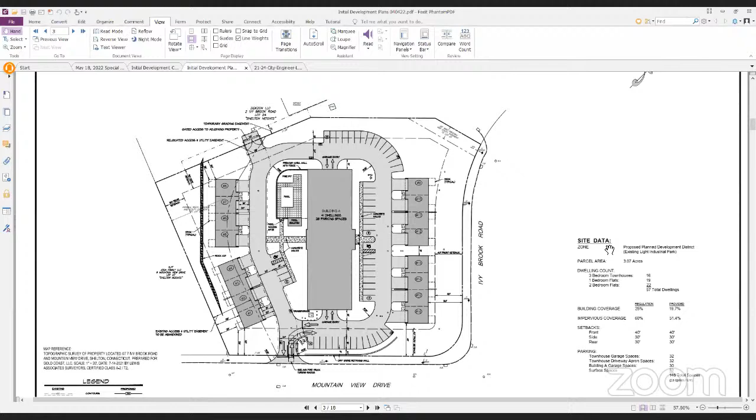All right, Attorney Thomas, do you have any other material to present? Yes, Pat Rose is going to present the architectural. Okay, so Mr. Swift is done with his presentation. Unshare, and I'll bring mine up. Okay.

Pat Rose from Rose Tiso and Company, 35 Brentwood Avenue in Fairfield, the architect for the project.

The first thing we'd like to go through is the parking level of the flat condominium building, which is accessed on either side from the circular drive. There are 30 parking spaces on this level. You have a lobby, elevator, mail, packages, and then a common space in the rear, and then 2 exit stairs, electrical and water.

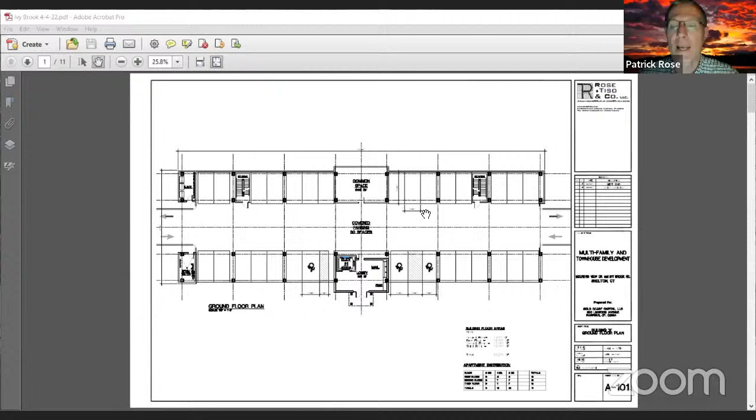Didn't we do this at the previous meeting? Yeah, it's the same, if you want to cut to the chase. What really changes is the elevation, because the apartments are the same. We've taken a level off.

Okay, let's go to the elevation. So instead of a 4-story building above parking, as you look at it on the downhill side, it's a 3-story building above parking.

You have brick on the lower level. We have an EIFS band that breaks the parking and the residential. You have horizontal siding on the first 2 levels, and then you have shakes above that, which are broken by horizontal siding, and then shakes up in the roof at the gables.

Similar building to what was presented, but not exactly the same. The other one had some board and batten because it was 4 stories. That put another material in it. We've just stayed with the siding and shakes with this.

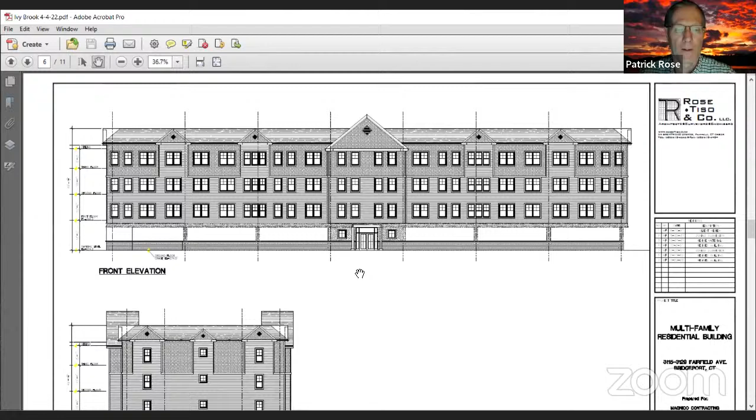The side elevation's the same, except it's 1 less floor, so you have the gables coming up to a mansard roof. The mansard roof acts as a screen to any mechanical air conditioning units up there, condensers.

So what would be the proposed height of the building? 49 feet, from the lowest level to the top. And is it still 208 feet long? Yes, same length, it hasn't changed. It's taken the floor out.

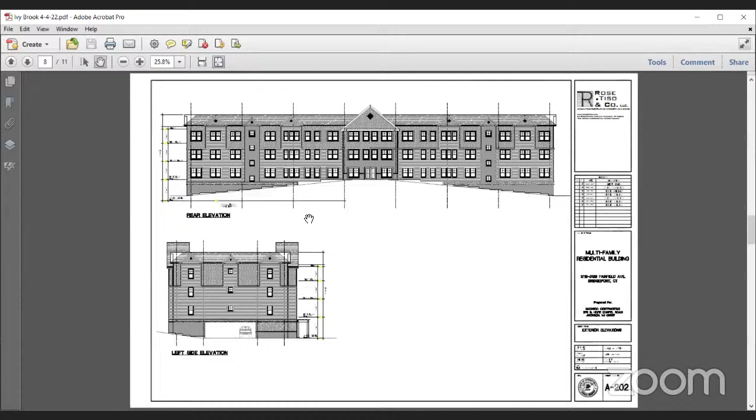All right, what else do you have for us? The only other thing are the other townhouses, which are very similar to the original townhouses, which are 3 bedrooms. We've gone to a similar townhouse, except the townhouses we've added are uphill style townhouses where the garage area is buried into the hill, and at the rear you have the dining room and living room, as opposed to the garage being at the street level for the driveway.

The other downhill ones, you're actually going downhill, parking at the street, and then it goes down the hill towards Ivy Brook. Same material, same treatment of the buildings. Those are the changes. Not as tall.

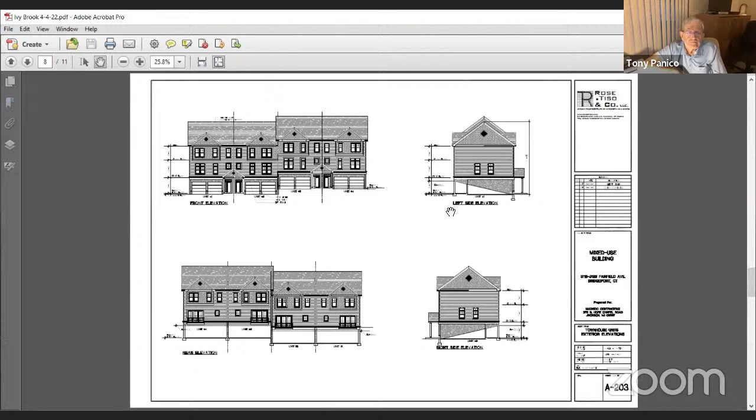All right, does any commissioner have any questions for Mr. Rose?

Attorney Thomas, any further comments? No, I think we've addressed all the concerns that were pointed out, and I think this layout is substantially better than the other layout, and resolves the issue of the easement and the accesses. We believe it is a better use of the property, given the small nature of it. It really hasn't been developable for LIP, but if it were, it would have required substantially more disturbance. So with that, I think we've answered all the questions raised at the last hearing.

Okay, I will open it up to the public. If there are any members of the public here in the auditorium who wish to comment on the new material, especially, you can approach the podium and sign in. In the meantime, Mr. Rossetti will allow any members of the public participating remotely to be identified if they use the raise hand feature.

Last call for any members of the public here in the auditorium. Mr. Rossetti, you have David and Judy.